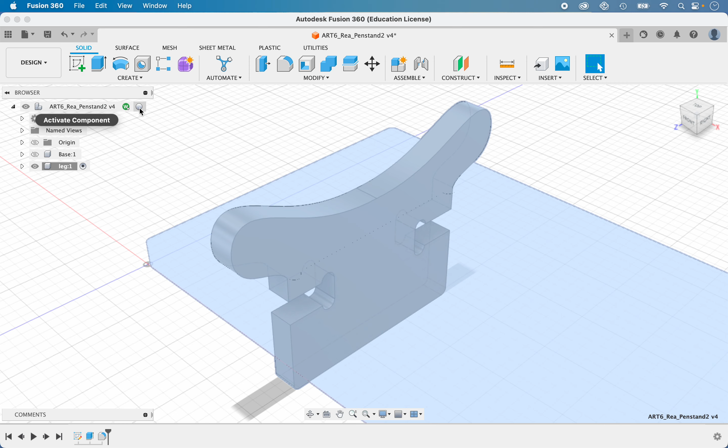So before we move on, we need to be sure that we go up to the top layer and activate it in our model. And now with the top layer activated, we can hover here, right click to get this pull-out menu, and we're going to click copy. So we have this leg copied.

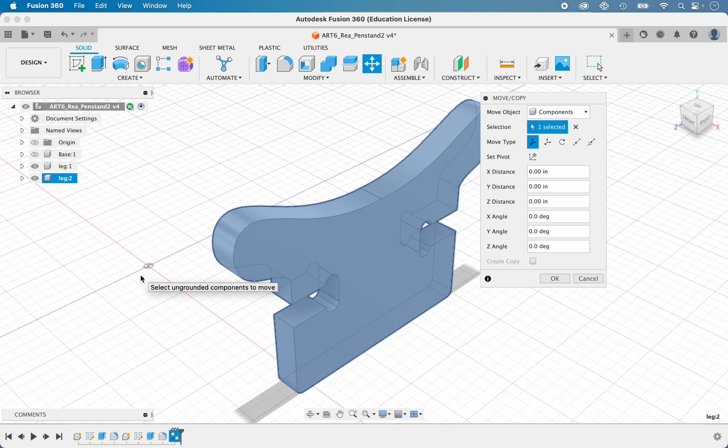Now let's click on the baseboard and right click again to click paste. I'd like to say something here about paste versus paste new. Because this design, the legs are going to be identical, I am going to go ahead and paste. What that means is any future changes I make to the first leg will apply to this leg that I'm pasting here. All right, so we've got our second leg, and let's just click OK right now.

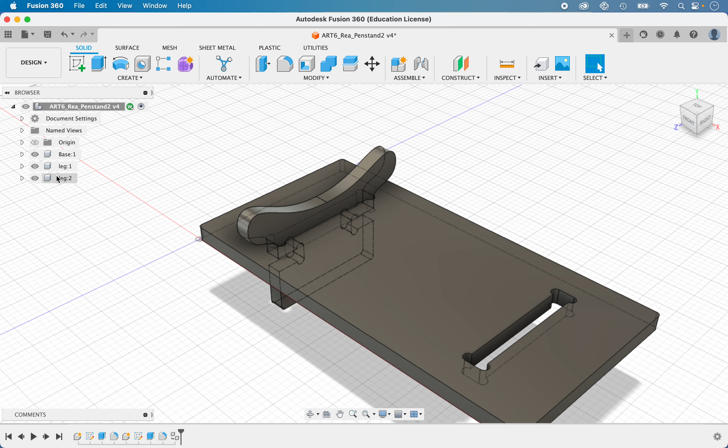And we'll begin to move it by using a precise move tool. Let's turn on our base so that we can see it. And now you can see this other notch that we want to move our second leg into. So this leg is coincident right now. They're both existing in the same space.

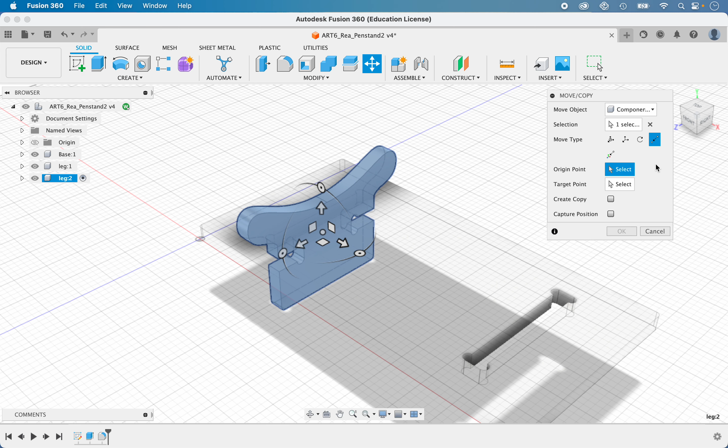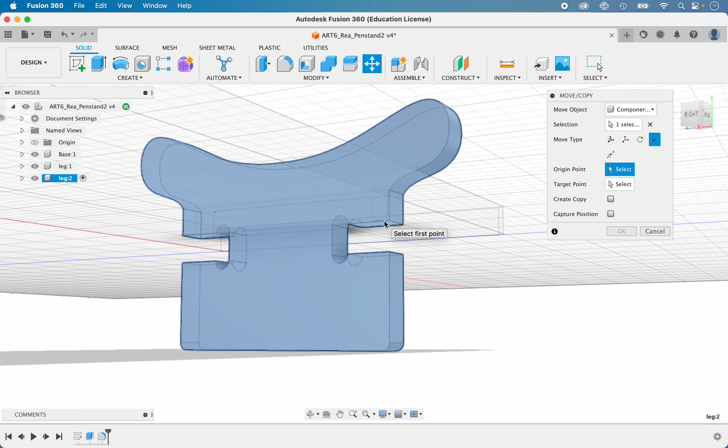So I'm going to activate the second leg. Click M for move. And I'm going to choose this point-to-point option. And it's asking for the origin point. There we go. That's very, very subtle, but that's the origin point I have selected.

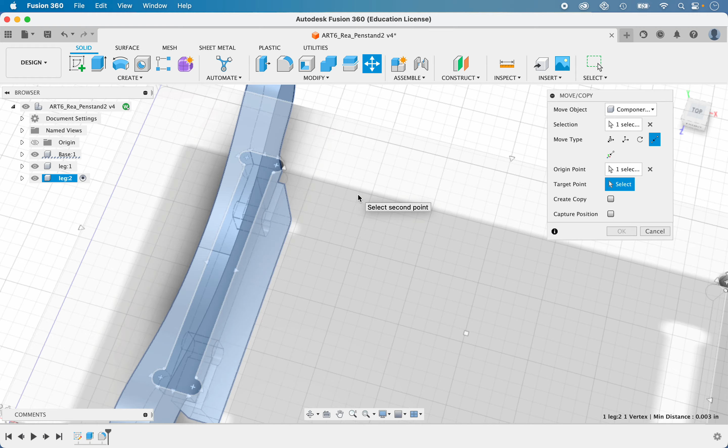And now we'll pull back, and we'll select the target point in the base. Great. And we'll click OK.

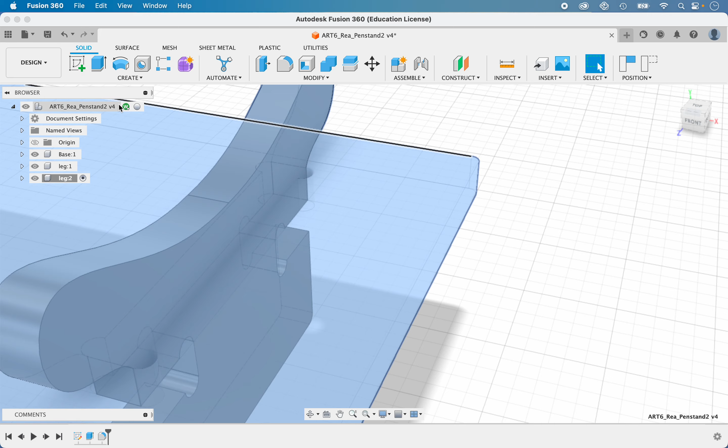So now, when we go back to the top layer and activate it and hit home so we can see everything, we should be able to see both legs positioned properly in the model.

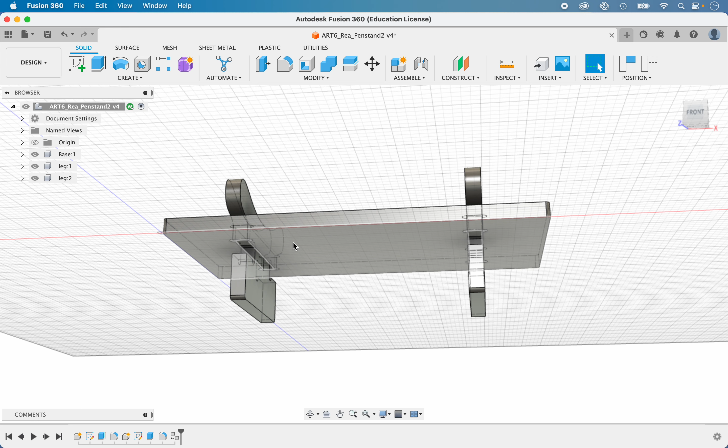And in our next video, we're going to model the tabs that will slide into these notches so that this base will not be able to move down. See you there.